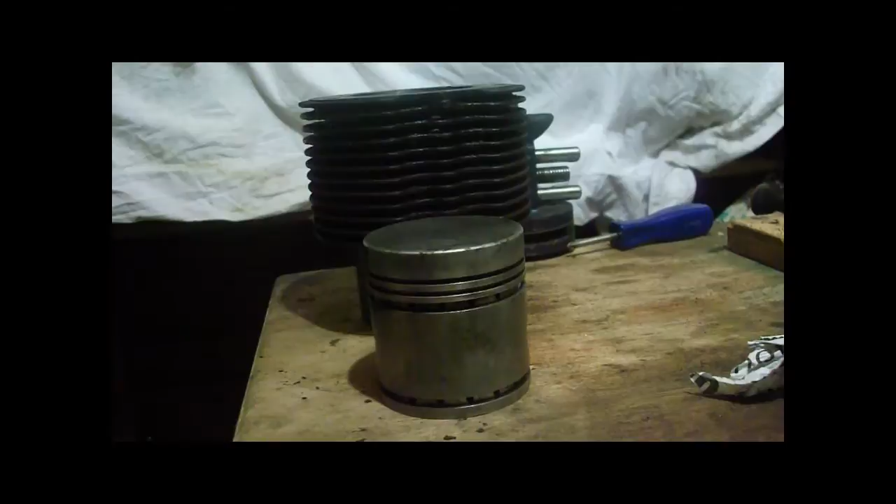Hello and welcome to the first part of my Petter AA1 diesel engine restoration.

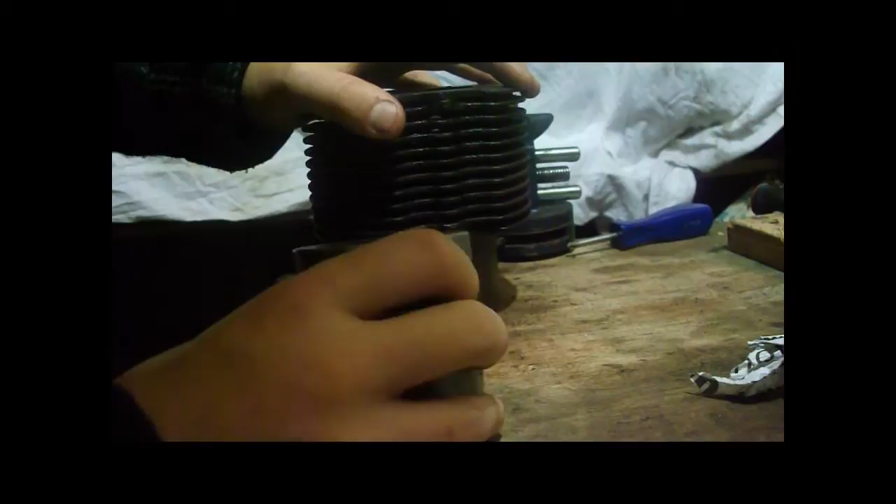You'll see from the pictures in a minute, or after the video, that after I took the cylinder head off and took the cylinder off, the piston only had the top 3 rings on, and I was told on the stationary engine forum that that was all they're supposed to have. Well, the place where the bottom ring goes is just left empty.

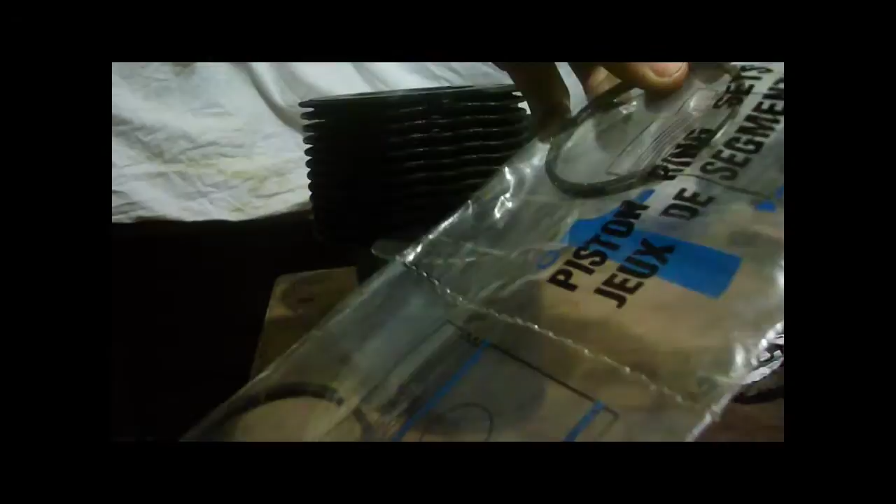But the piston and cylinder has been to a local engineer's, and I've got a fresh set of rings. But in there's not 3 rings, there's 4. There's 2 oil scrapers and 2 compression rings. So, well, that's that, isn't it?

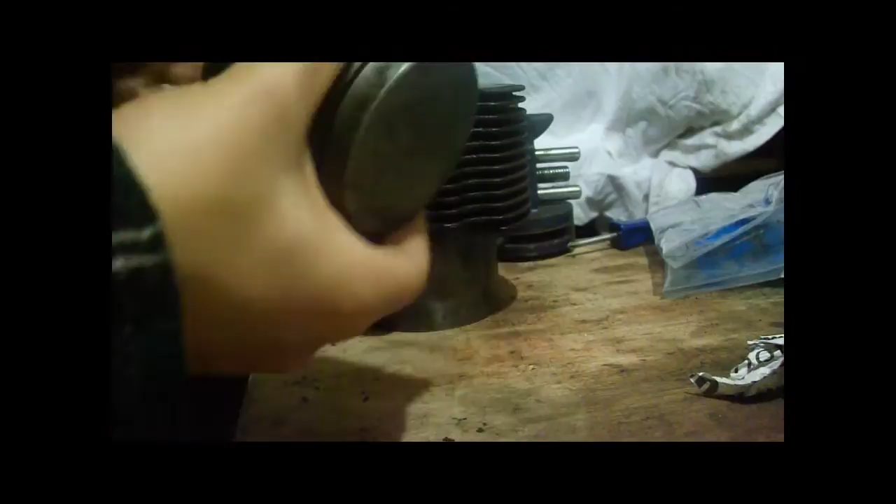Apparently, the faster speed engines, the ones fixed to 3000 revs per minute, have just the top 3 rings. But because this one's a variable speed model, you have the extra ring on the bottom to stop the oil at low revs. So I've got the 3 rings, or 4 rings even.

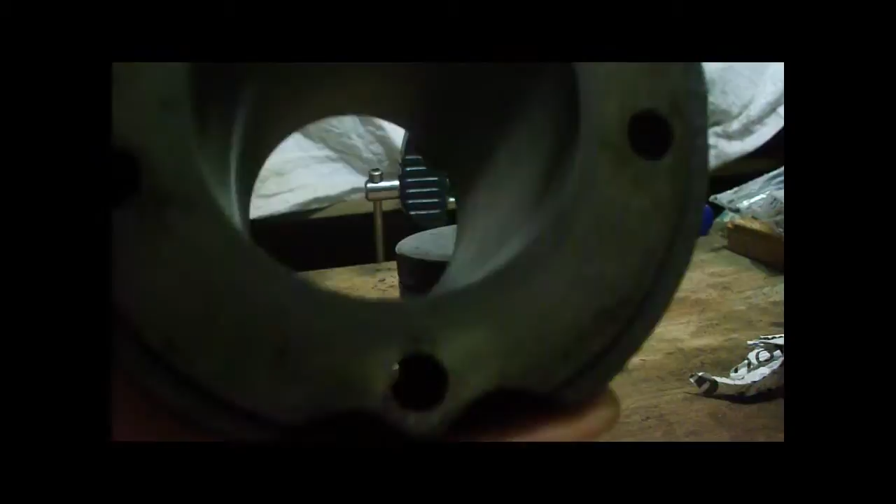So the cylinder's been honed. You can see in the bores, not shining. It's slightly dull. It's honed quite well. The engineer's done a good job. So now I'm going to clean the piston up and fit the rings.

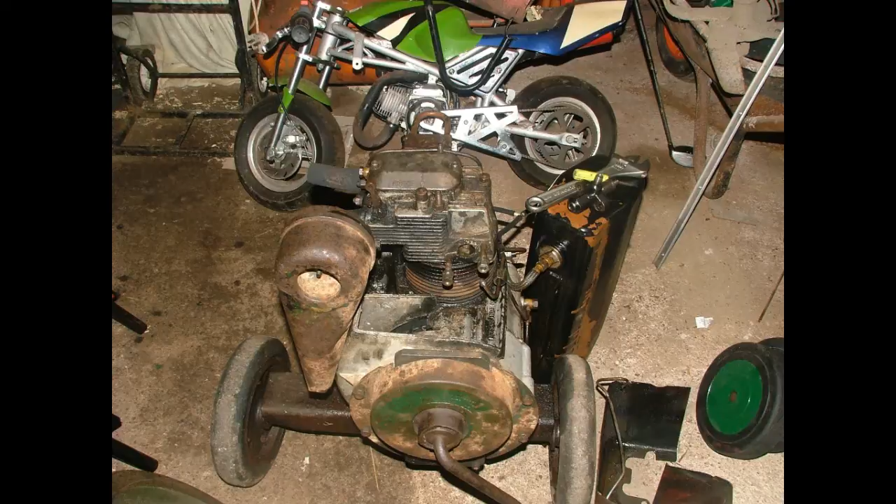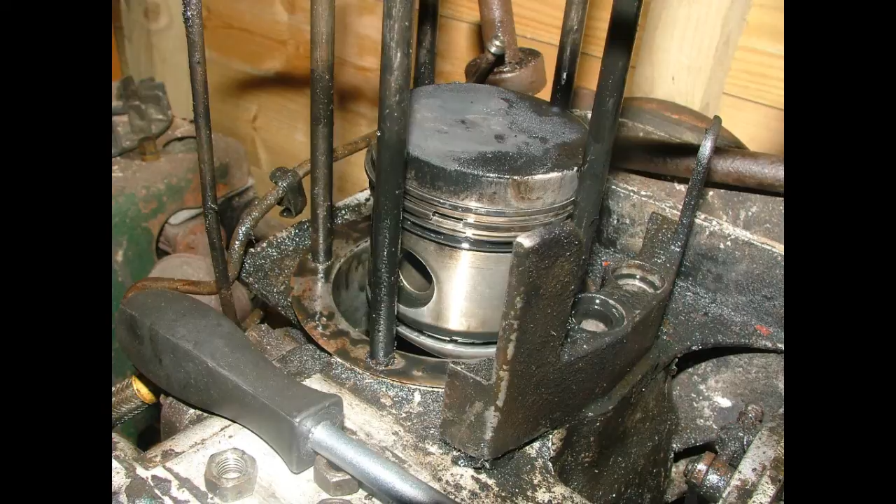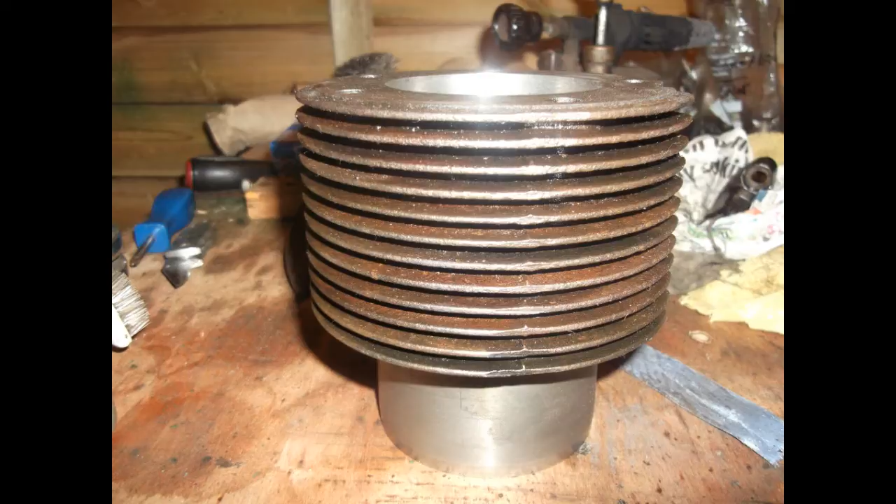Well, as you can see, the barrel's looking a bit cleaner now. Letting the stuff dry off before I paint it. I've also put the rings on the piston. It's got the extra ring on the bottom now, so that should stop the oil now.

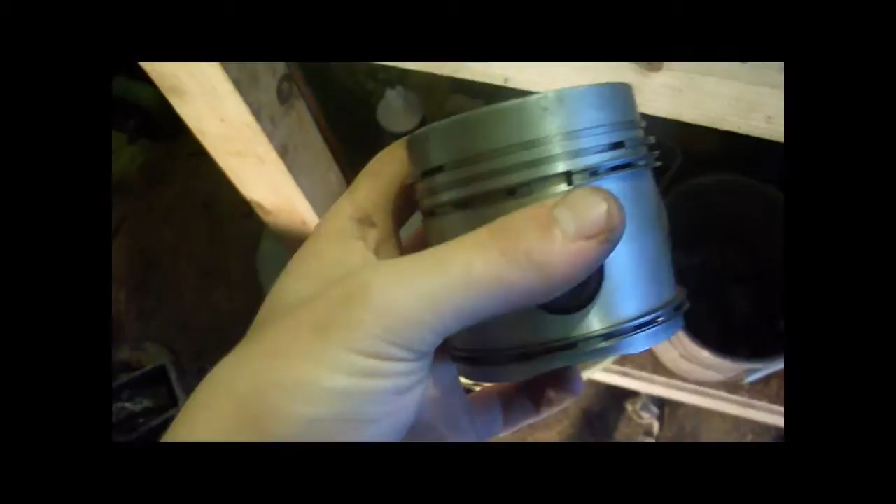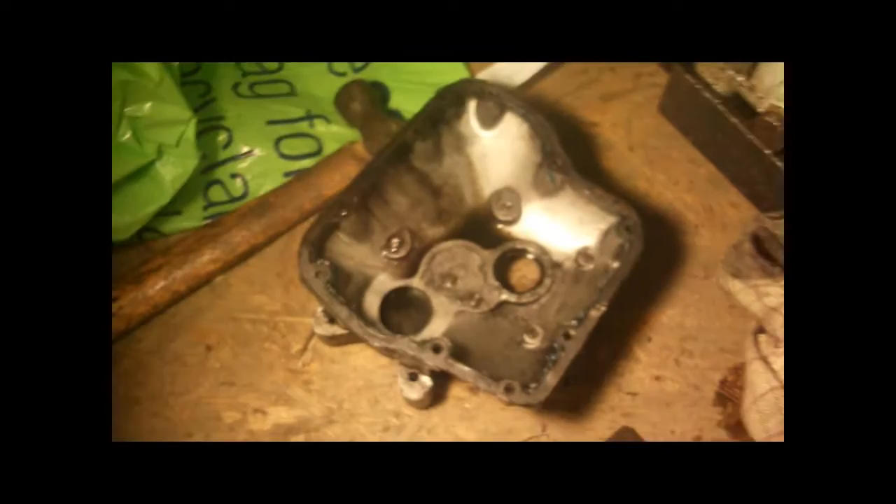The rings are gapped correctly in the bore, but as you can see now, I've took the back cover off because I want to change the shaft around. As you can see, it's on the cam gear at the moment, so it runs at half the engine speed.

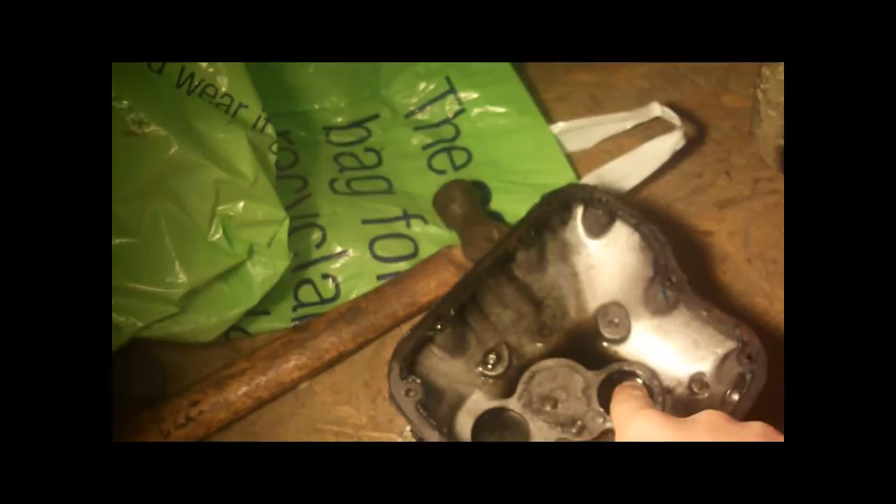So all I have to do is pop those Allen keys out, put the shaft down there, and bolt it in the crank. Then I have to take that cap out and put it there, and then take the oil seal out of that hole and put it there, and then it's good to go. So that's what I'm going to do now. I may have a little look in there. It looks fairly clean, but I may clean it a bit as well inside.

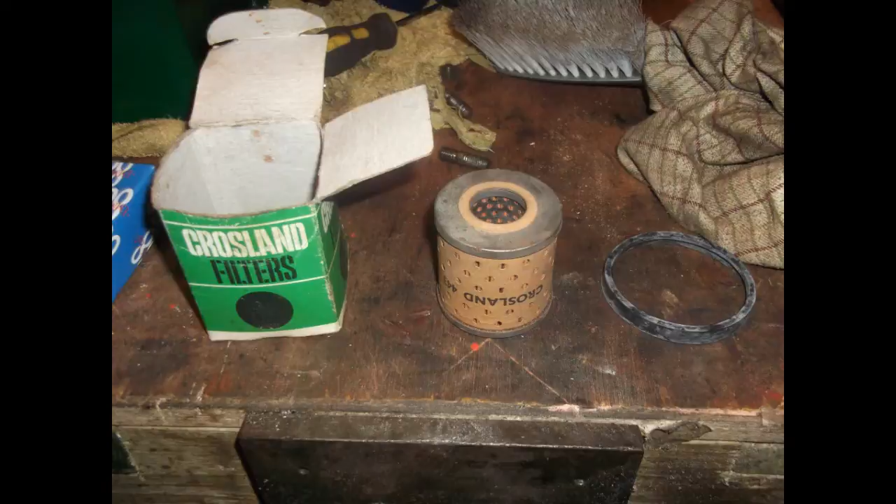Well, that's the shaft off. The last nut took a hell of a lot to get off because it was creamed right up tight. Now I'm wondering, because there's thread in the side of this camshaft, but there's no bolt there. But on this one there's a bolt. So I'm wondering whether the shaft holds the camshaft pulley, or the gear, in when it's in the engine.

So I'm going to go and look at the manual and see if that has to be swapped to there when you swap the shaft around. It should tell you. So that's what I'm going to do now.

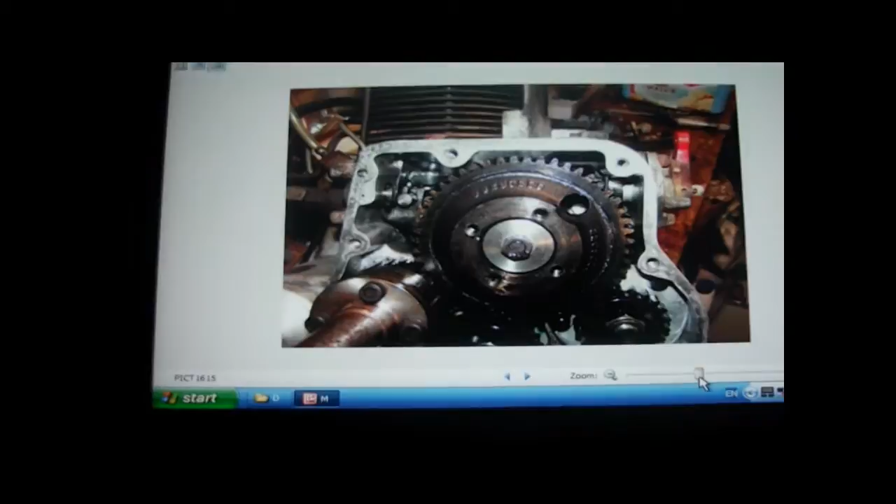As you can see, on this picture, which Make Do And Mend sent me, the nut is on the other shaft, on the camshaft, not the crank. So what I'm going to do is take the nut out of the crank and put it in the camshaft, and then put the shaft like that.

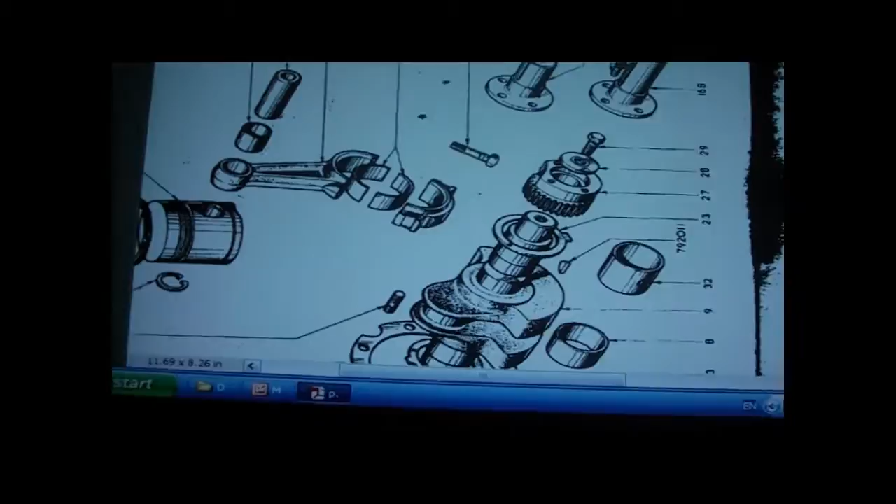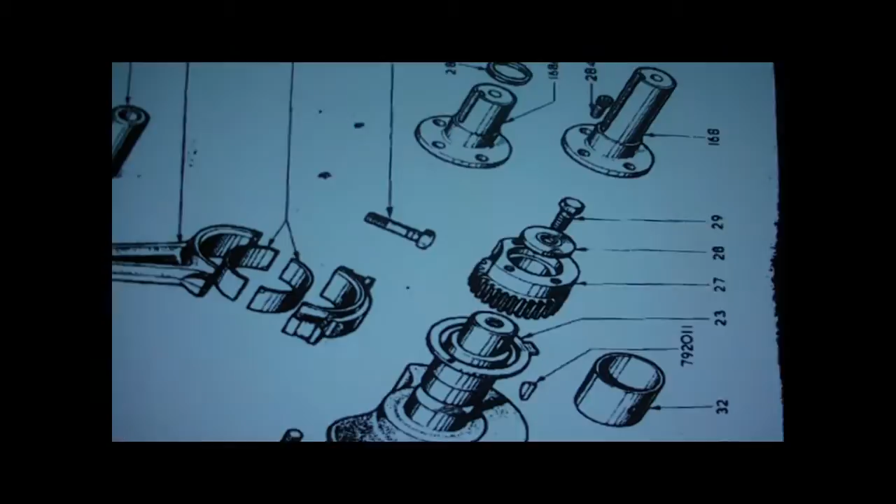Well, as you can see from a picture in the manual, the nut is on the crank gear, and the shaft is on the end as well. So slightly puzzling, but I don't think it's going to matter too much because this gear is keyed onto the shaft, and when the shaft extension is bolted on, it isn't going to pull off its key because it can't move out anyway. So I don't think it's going to matter too much.

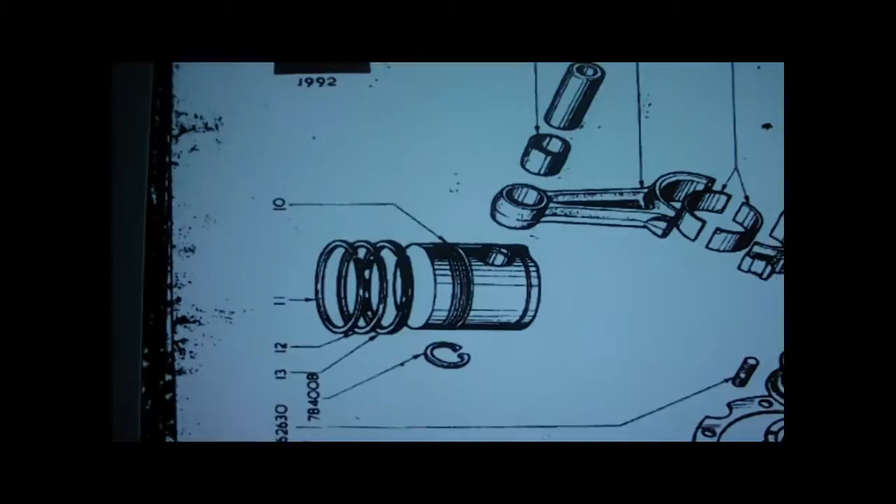Also, if I just scroll over sideways, there's only 3 rings on this engine and a gap for the 4th. But when I got a set of rings, it come with 4 rings. So that's puzzling as well. But it don't matter anyway, because I'm going to put the 4 rings in. Well, I already have.

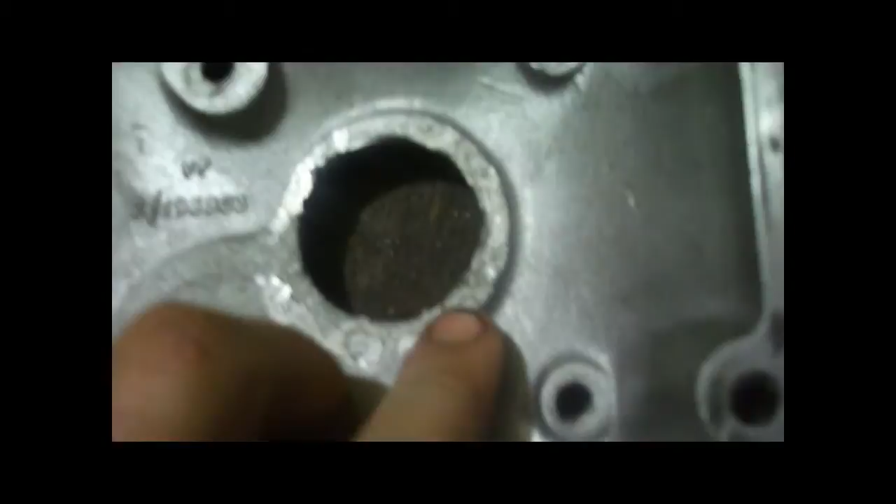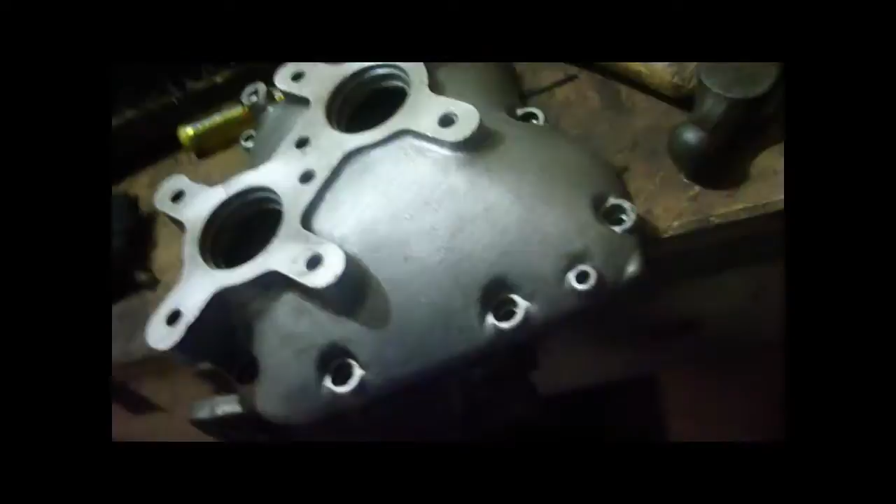I've cleaned the shaft up now, it's looking quite a bit better. Removed the injector pump because I'm going to clean up the casing in a minute, and you see I've cleaned this up, the casing and that side. I've buffed it up with some wire wool, which is quite good. It looks really good actually. And I've sprayed the barrel now. It's in its 2nd coat of barbecue paint.

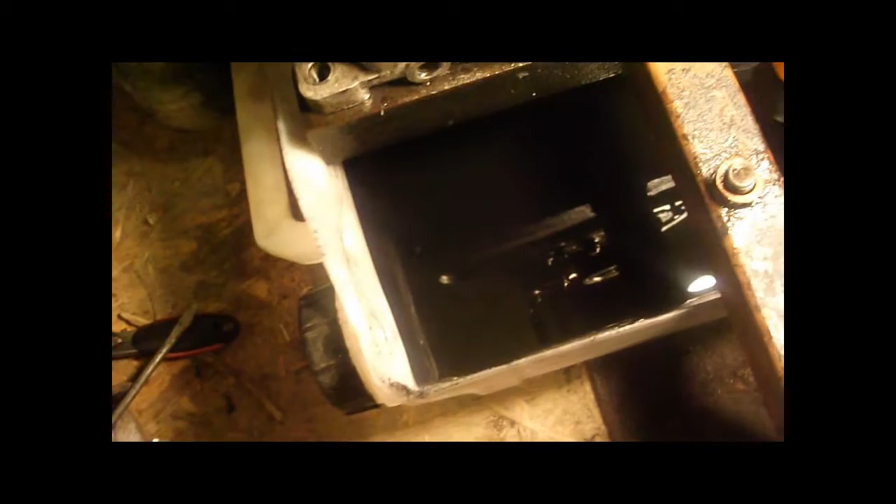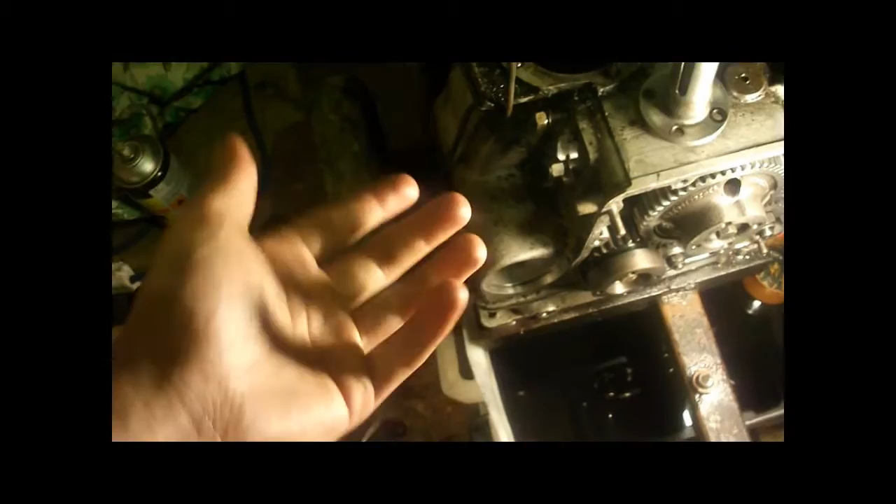Dropped the oil. You wouldn't think that oil was only done about 10 minutes work. And took the filter out. You see the filter in there. So now I'm going to buff up the casing all I can, and then take it off the trolley and remove the sump and have a look what's in the sump.

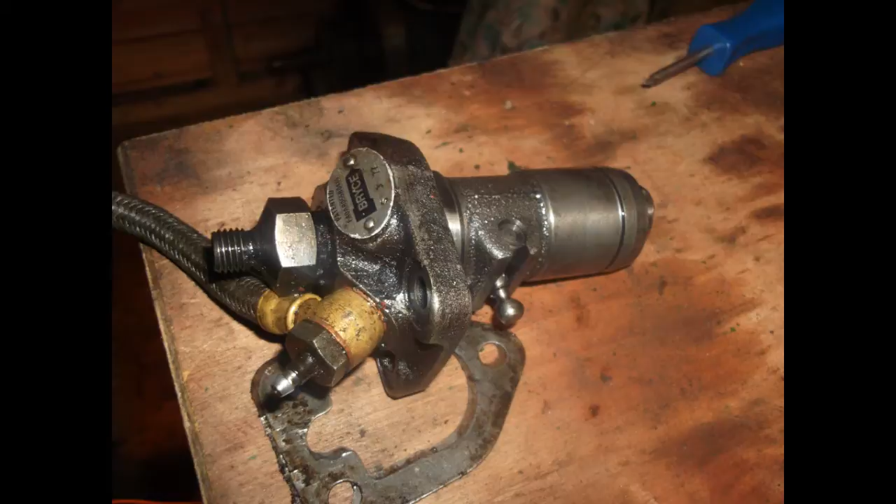Well, that's the crankcase all nice and cleaned up now. The fuel pump and that's all been off, well, the shut off and run switch, or stop and run. The throttle's all been took to pieces and cleaned up. It's quite mucky in there. Yeah, that's all sealed in now.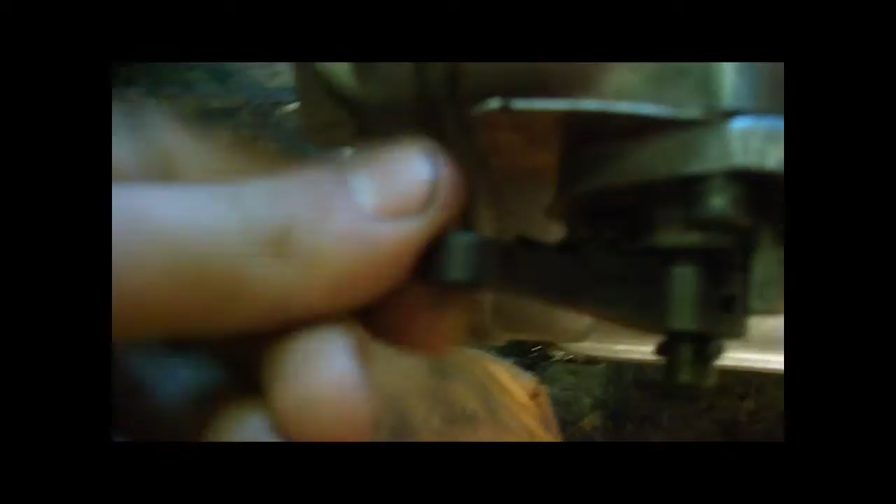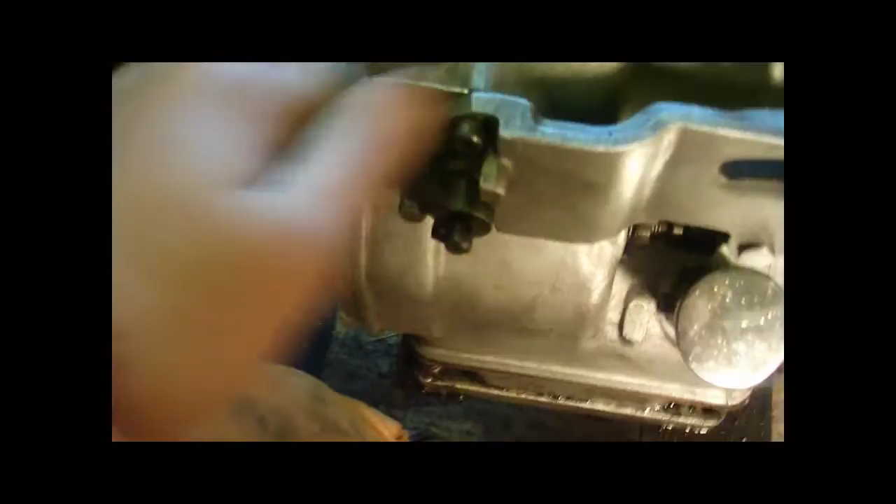You can see this lever, it wasn't working properly before, it was all flapping around. But if you see the taper on the back of the lever, the taper is actually on the inside. And there's a clip here with like a bubble on it, if you can see it, and that one goes up and clips into place to hold into the stop position. So fixed that now, put it the right way around. The pump's been off, cleaned it all up.

Yeah, I've been testing the injector. It might still inject, there's no fuel in it as such. So that's alright. So before I take the sump off and clean that out, I think I'm going to tackle the cylinder head. Clean the fins up, basically just give it a really good clean, decarbonise it, and then grind in the valves. So that's what I'm going to do now.

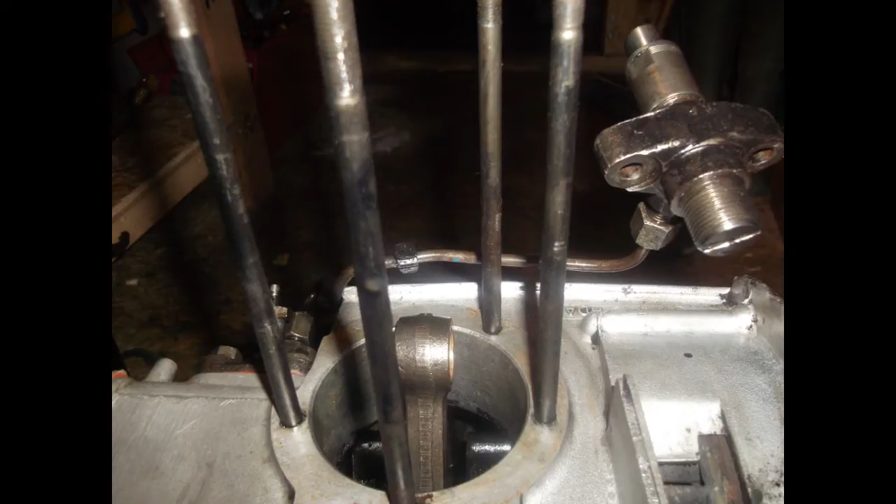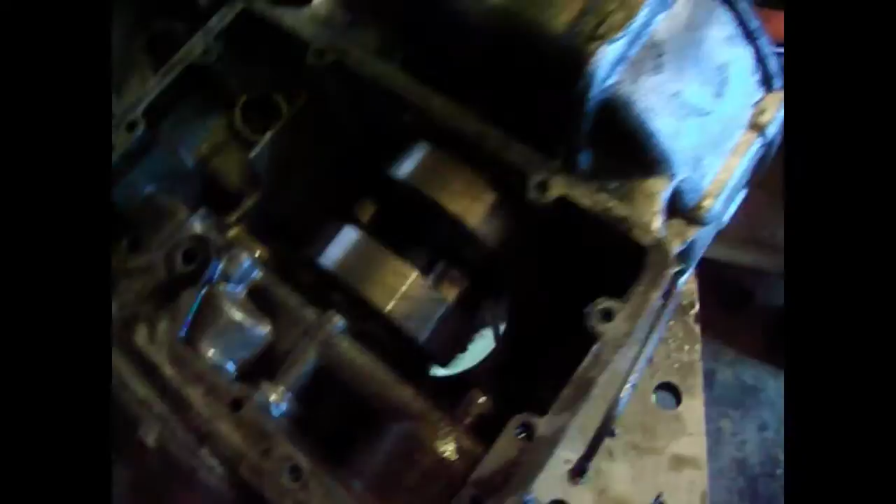Well, that's the cylinder head nearly cleaned up. I've decided to take the sump off now, so that's what's in the sump. Got to clean it all out. You can see it's a bit mucky in there. And that's the sump. There's the oil strainer for the oil pump. I'll clean that out and then put it back together.

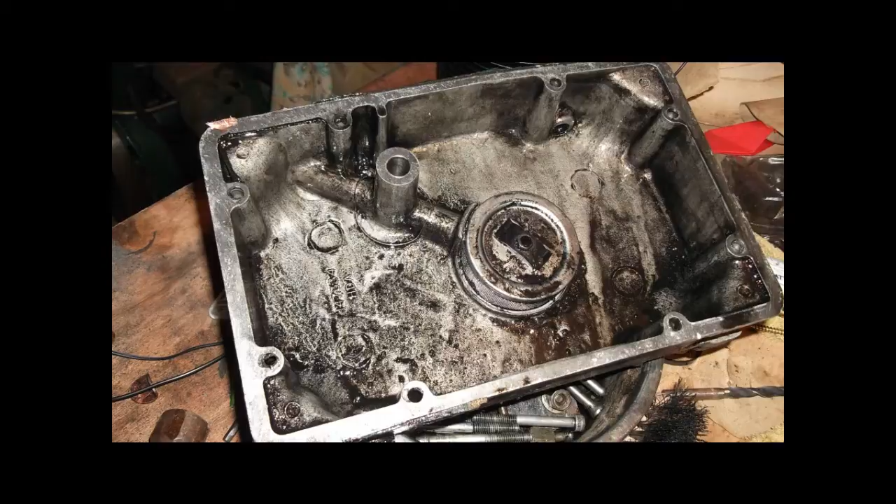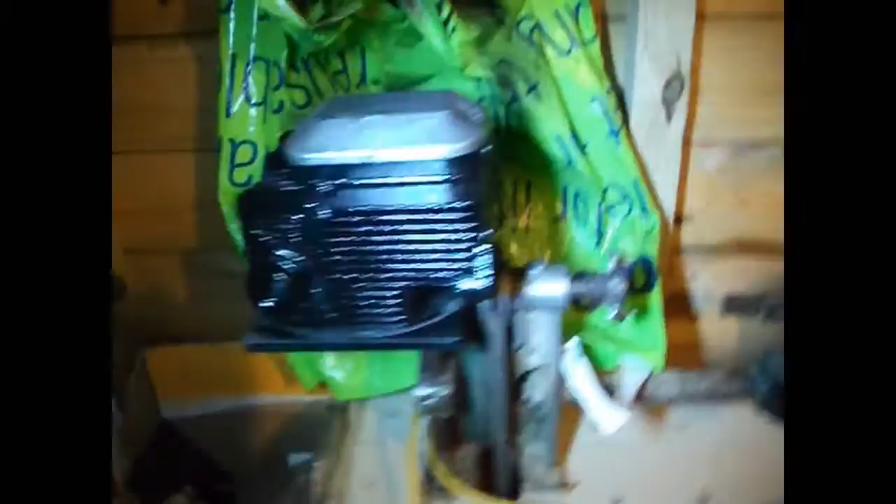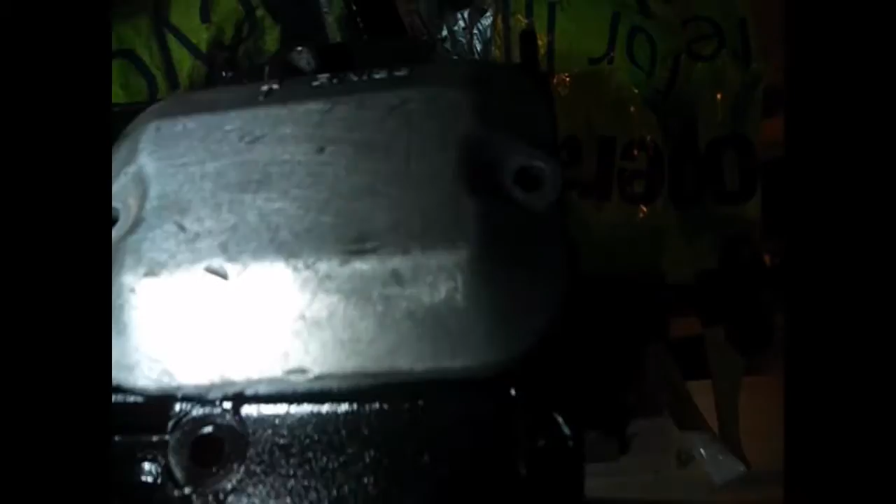Well, I've just finished cleaning the cylinder head and given it its first coat of barbecue paint. I think it's looking quite smart. I purposely left the rocker box cover aluminium. I haven't finished it yet because I've got to file off some dents and chips. And then I'm going to draw the PETTER logo on top and then lacquer it to keep it right. So I think that'll look quite good. Yeah, it's looking right now.

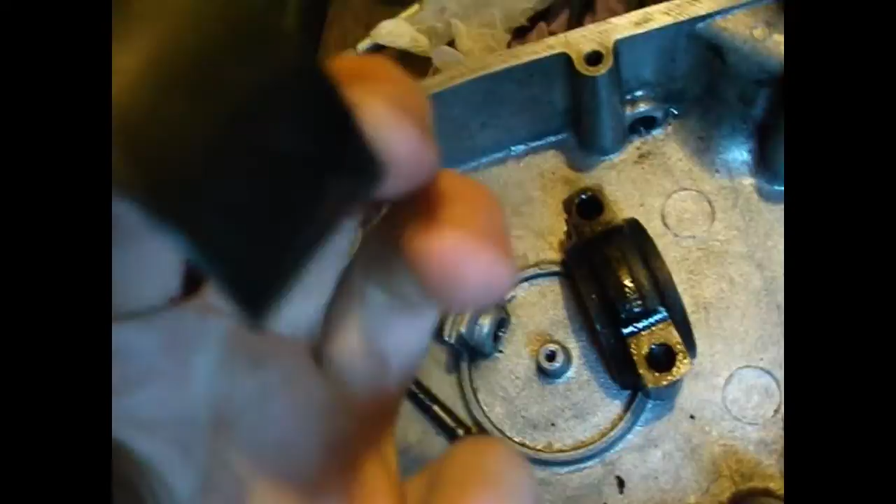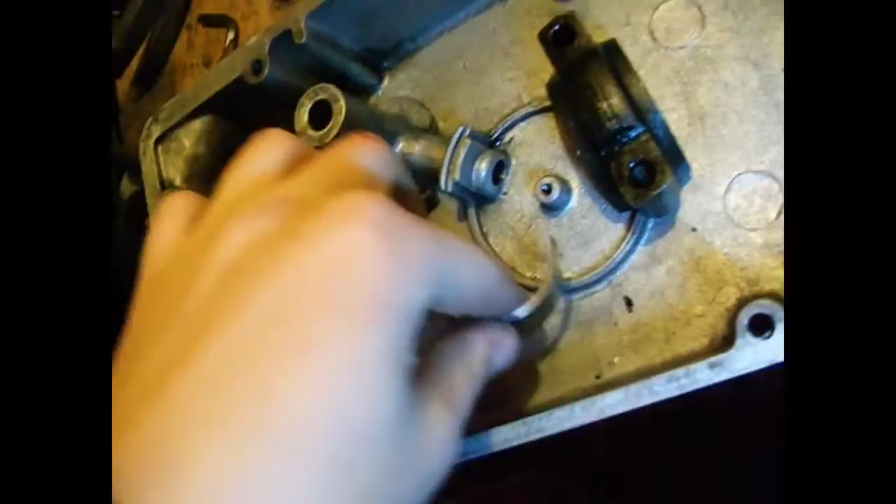I've got the sump off, as you can see. I've nearly finished cleaning the sump now. Can't really tell you much about the big end and that. I've been looking for if it's a standard size or not, but it only says 2-253500. And on the top above that there's G in a square and D in a square, and after that there's JW. I don't know what that's supposed to mean, but I can't see a standard size on it anywhere.

So this is the end of the first part, and in the second part it should be finished.

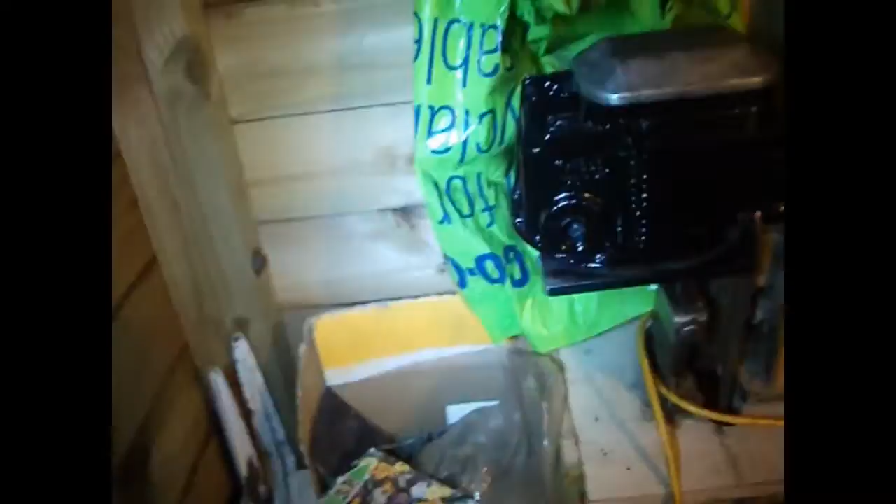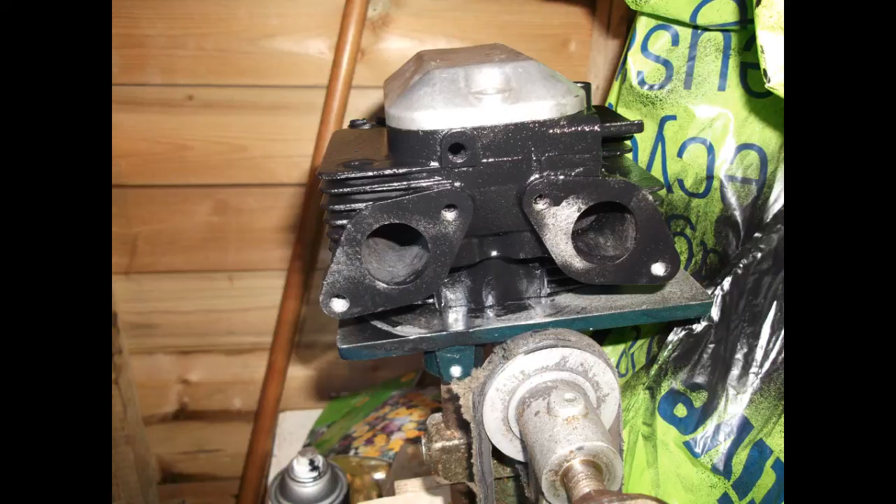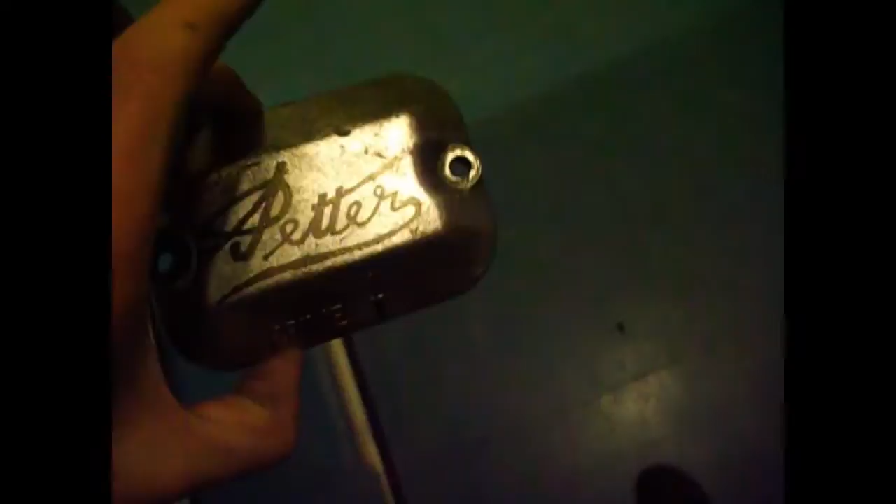Well, just before I finish this video, I thought I'd show you what I've done to the rocker cover. Cleaned it all up, as you can see, with a wire brush on the drill, and permanent markered the prime and the arrow, and drew on the PETTER logo. Isn't the best one I've ever done, but I think it will do. The P ain't quite right, but yeah, I think that will do for this one.